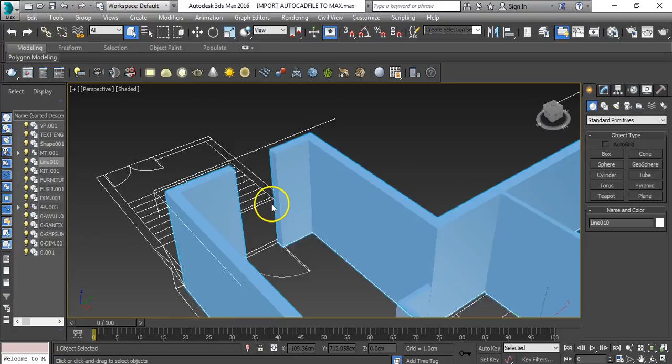And today we are going to continue from where we left in the last lecture. So let's go ahead. So let me cover all these top areas in the door side. Alright, so let's go to the top and let's cover all these areas.

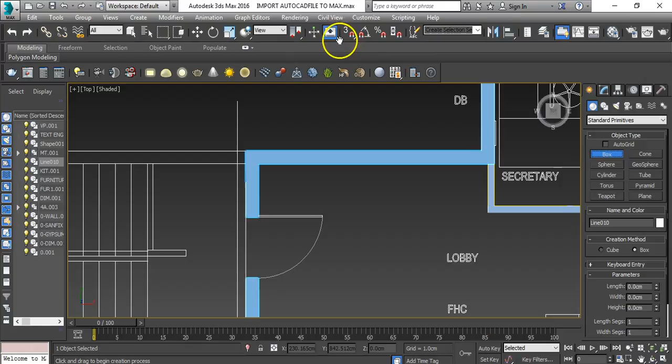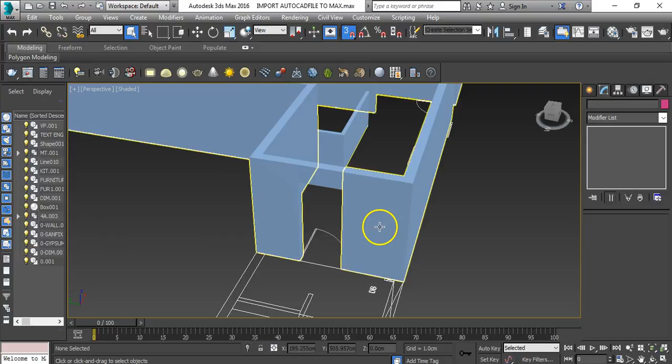What I'll do is I will activate snapping tool here so that I can draw this properly. Okay, and when you go to the perspective, you will see here, right, we have drawn this. I want minus 40. All right, so the height is 240 we have kept. So this is 40 centimeter and 2 meter height is the door height I'm keeping for this project.

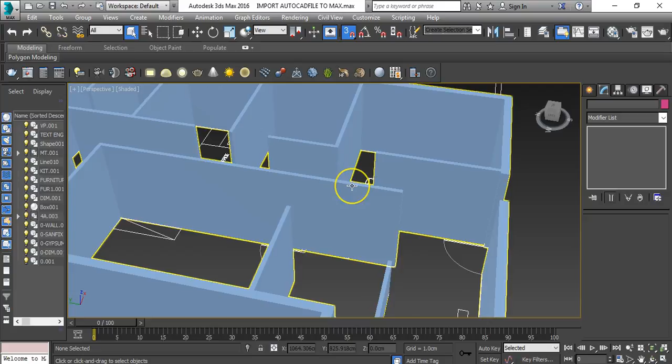Okay, so you can see now it is looking fine, right? But not this. This is good. So what I'll do is I will cover everywhere, here, then here, everywhere. You have to do the same thing. So go to the top view again, and let's continue drawing this. So I'll create this rectangle here, snapping on, and let's start creating it.

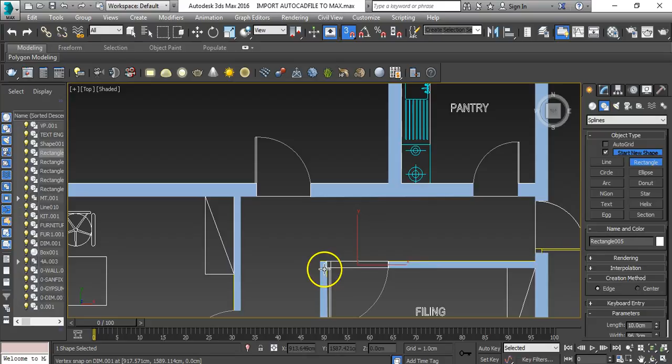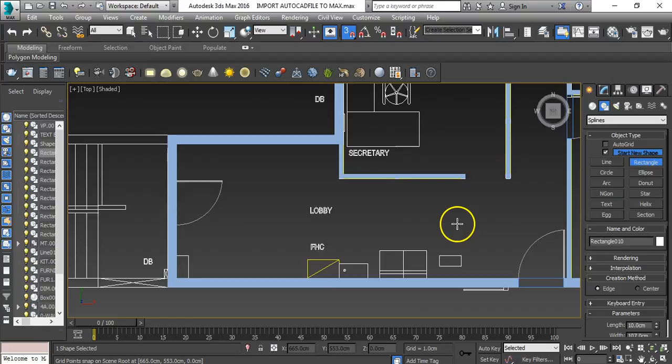I just keep on creating the rectangles everywhere where you can find the door, and then later we'll select all the rectangles and apply extrude on it, right? And we'll extrude all together, so you don't have to create boxes all over again. Okay, this will be open. All right, I think this is done. Let's go to the perspective and check it out.

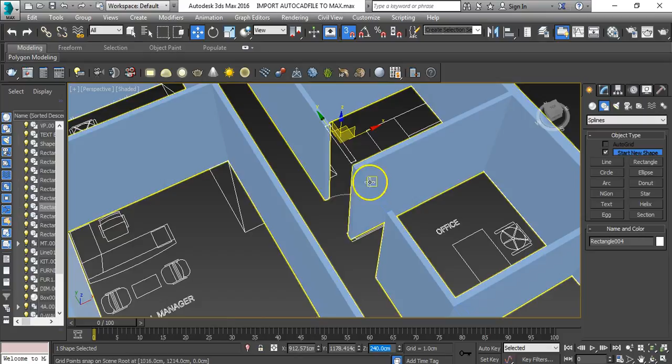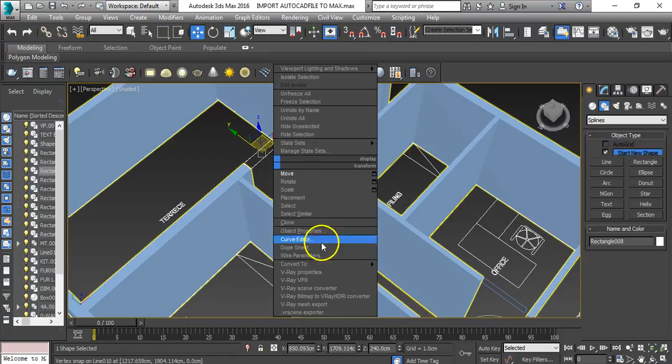All right, but some areas like you see here, it is here. Okay, so just select this move tool, take this to 240 place, that is here. Let me check this. This is not full. Later I'll do. Okay, here. All right, not an issue. So I'll select this one, snapping off, right click and convert to editable spline, and then keep on attaching all this spline.

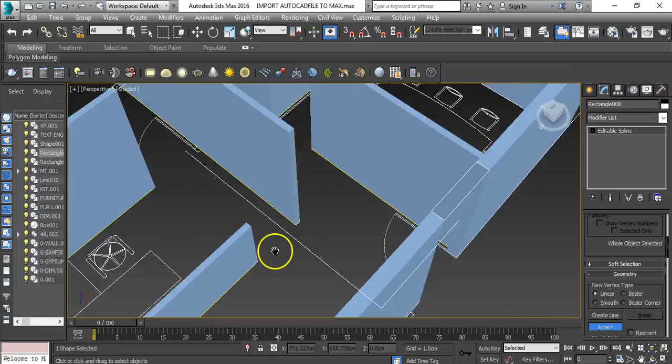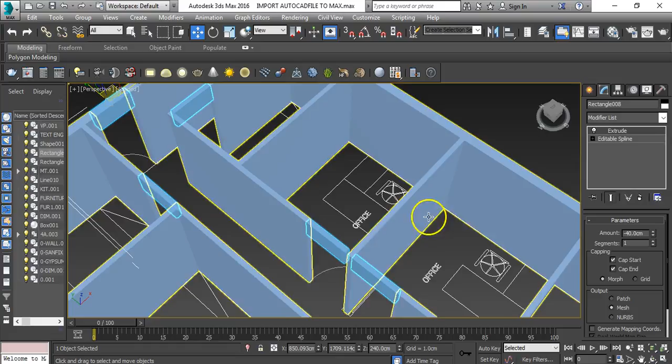Why I'm attaching is when I apply extrude, the extrude will apply on all the rectangles. So you go here and you apply extrude, and you see everywhere the extrude is applied because we have attached them. So then I will do minus 40. All right, here we have a problem, this one. So go here, click on this spline, move these two splines and take them inside here. Done.

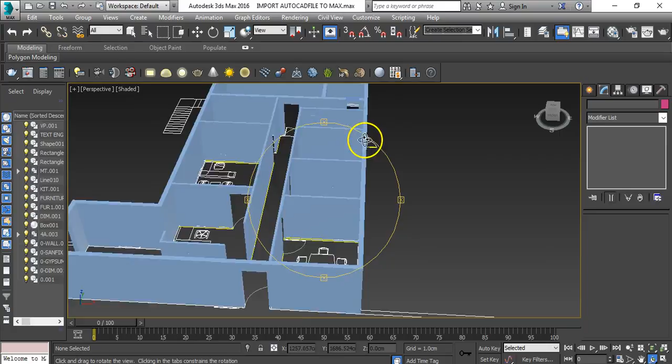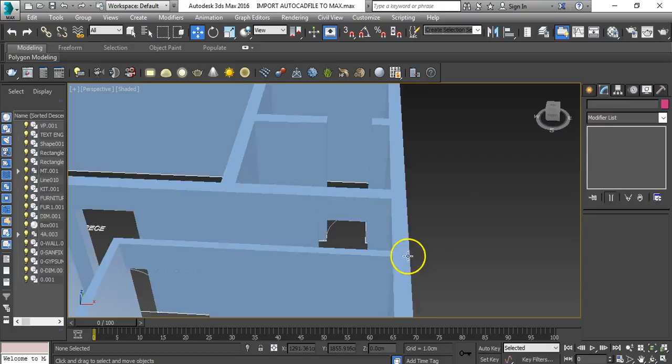So now when you see this, you have covered all the doors. Okay, here, we actually missed this one. We can apply it separately, not an issue. Apply extrude here. Extrude minus 40 is by default applied. All right.

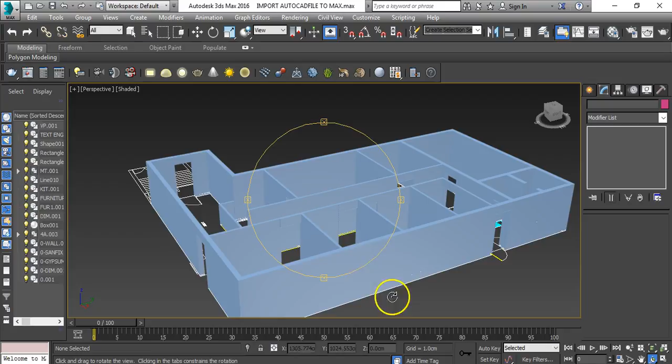And the next important task in this lecture is to create windows. So how will you create the windows? I mean, we are not creating windows, but the place for windows, just to make a hole inside the wall. So we will use boolean for that. Let's see how we can do that. First I'll go to the top, T, and let's see where we have windows.

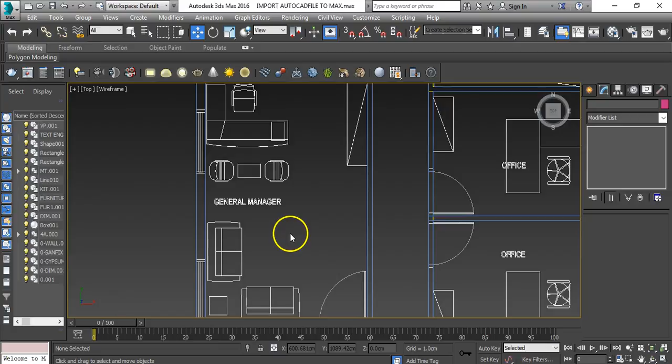Now you have windows here, but I'm not going to create a window here as the client told me not to, right? In the final plan, they actually removed this, and I forgot to remove it from here, because this is the lobby, and they want to place a sofa here and then a logo on the wall. So even in our lecture I don't want to create this. So where we will create is here, the general manager and this office area. These two areas are the main.

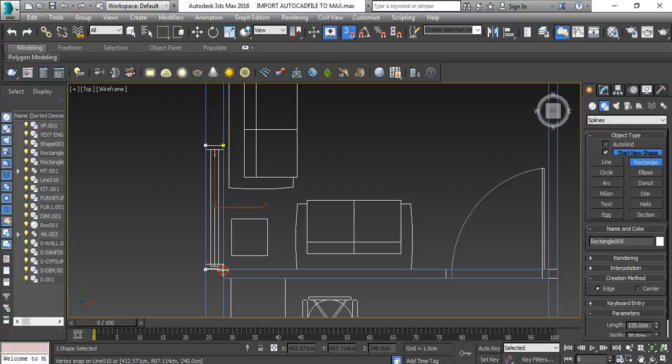Okay. All right. So let's create this window here first. I'll take a rectangle, snapping on, and create this part. And then come here and same thing. And you have window here, you have window here.

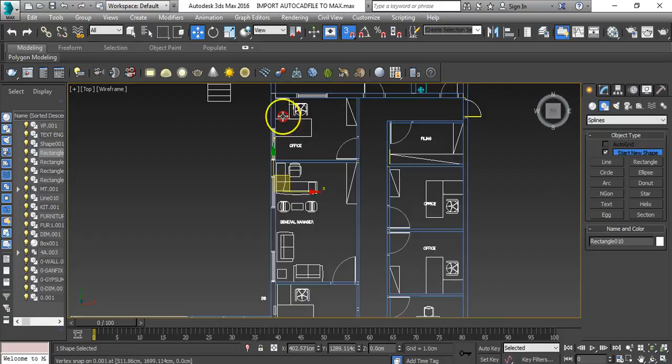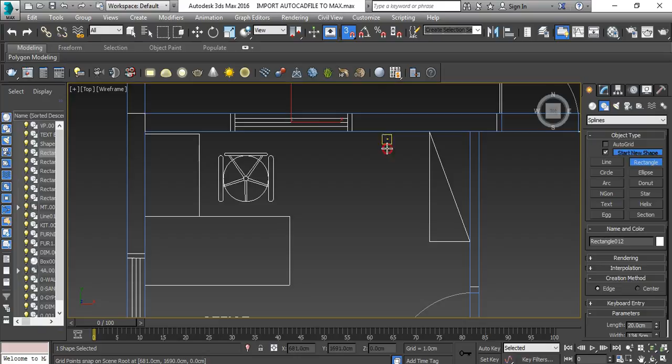But in the project, we are not going to show this part. The general manager room has two windows here. Let's create this also. And let's have this also. Let's go to the perspective view. Snapping off. And let's select these rectangles and apply extrude.

Now the total height is 240 and the door height is 2 meter. The door and the windows should be on the same line, right? So that means the end of the window will be at 2 meter. And I want the height of the window to be 120. So that means the window will start 80 centimeter above the ground.

So you go here and then apply extrude 120, but 80 centimeter above the ground. And I will scale this like this. Why, I will show you in a moment. Select this one, same procedure, extrude, move up, sorry, 80 centimeter above the ground, and then scale it up in this direction. Then select here and then extrude this one.

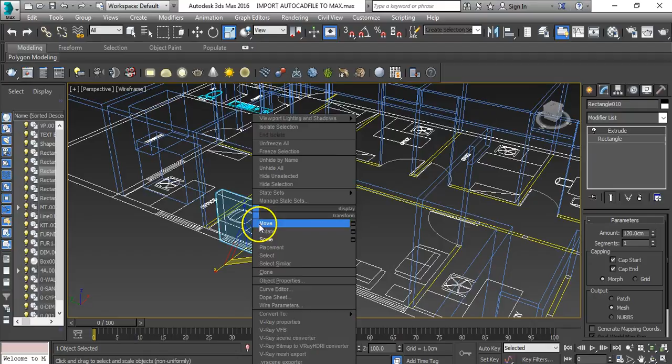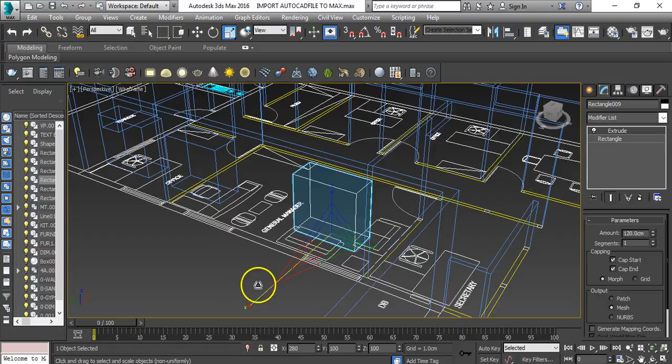Anyways, I want this one about 80. Scale this, select this one, extrude it 120 above the ground, 80 centimeters, and then scale. Done. So now when you go to the top, F3, you have these shapes here at the place of the window.

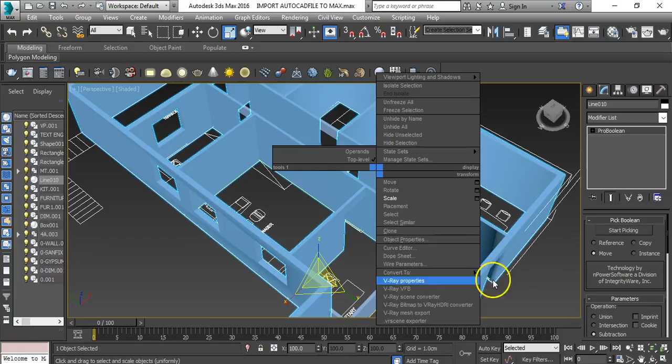Why I scale is because I want to boolean this area. So I'll select this wall, go here to boolean, pro boolean, start picking, and you can see we have created a space for windows. Don't worry about all this stuff. Convert this to editable poly, then select all the polys and go down, down, down, press clear all, and you will see that the problem is gone.

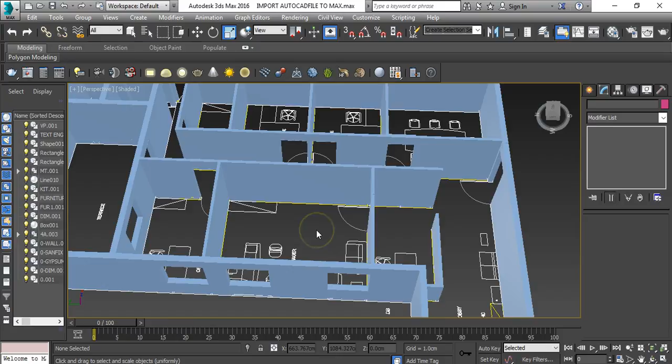So this is now the door opening, the windows opening, right? And then at the last, for now, what we'll do is create the floor and same on the top, the ceiling.

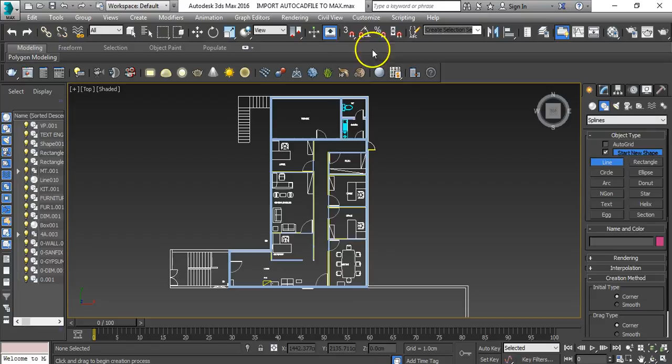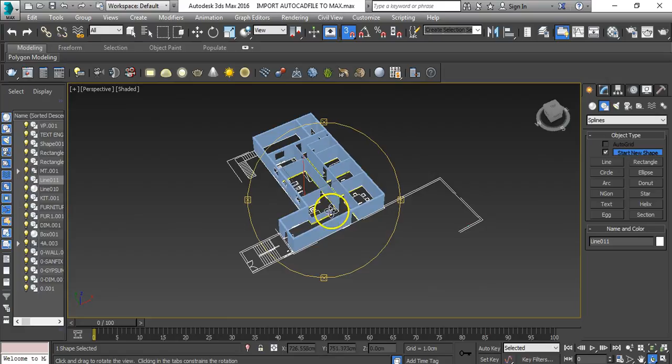So what I'll do is take a line, snapping on, and let's start creating from here. Go to the move tool and apply 0. Go to the perspective and check if we are correct. Sometimes there is a problem, like snapping causes an issue, sometimes one point here and one point here, so you have to align everything properly.

Go to extrude and extrude like minus 5 centi. Okay, so now you have a floor here. You can see we have a floor here.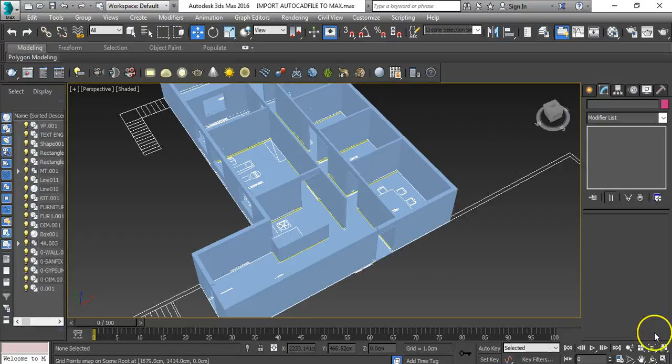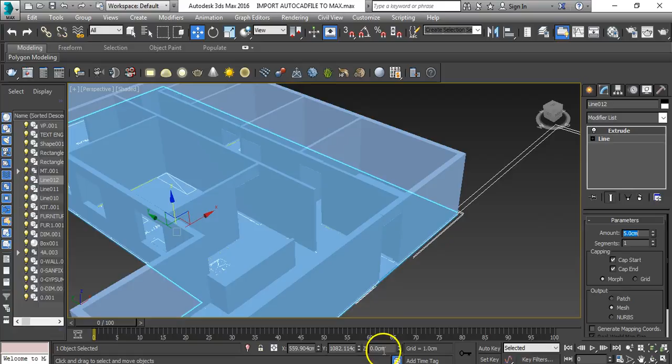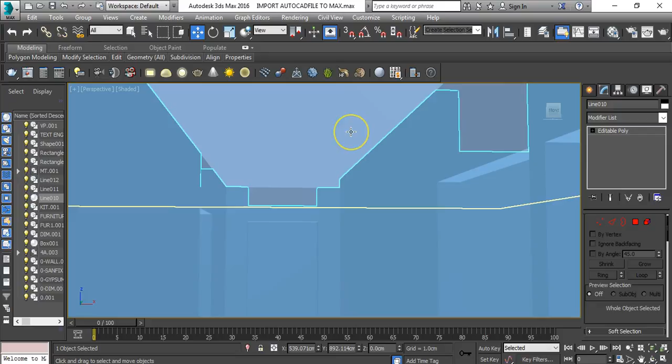What I'll do is select this floor and clone it, copy, plus 5 centimeter, and put this at 240 centimeter height. So this is your ceiling. So now you are inside your office, you can see here. Do not select this, just select outside somewhere, and you can see this, we are inside the office.

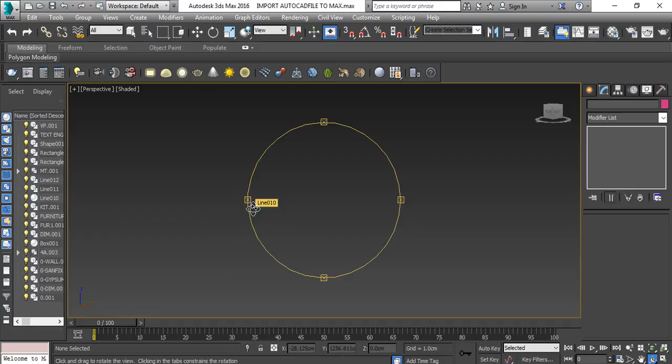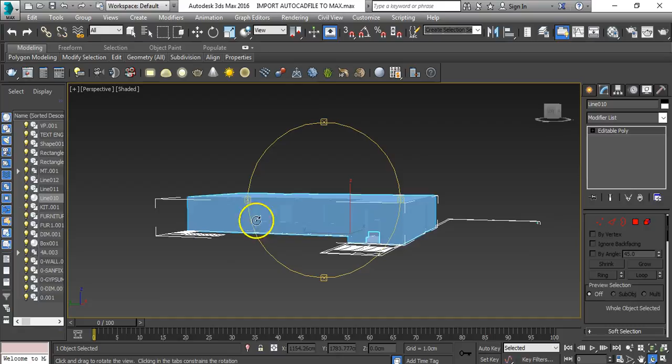I think this one is the secretary area, yes. Okay, this is the office, and this one here is the secretary area. And this is the entrance here.

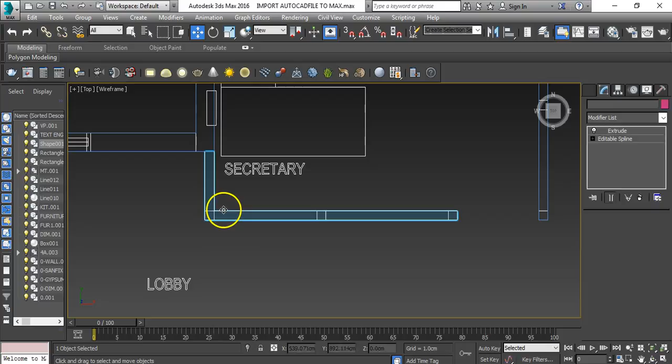Okay, so this is enough for today. Go to the top and see F3, right? This is the entrance here and everything is created. Here also I want to do something, I don't want this like this. What I want here is let's hide the top and let's hide the bottom also, and here I don't want like this.

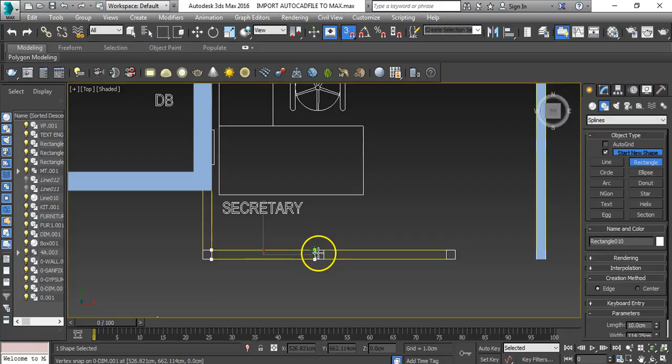Here what I want is I want this one as glass, so I'll create this separate. This one also glass, and this one here glass. So what you do is convert this to editable spline, go to attach, and attach all these. Let's move and see if we have attached the proper splines. Yes, okay.

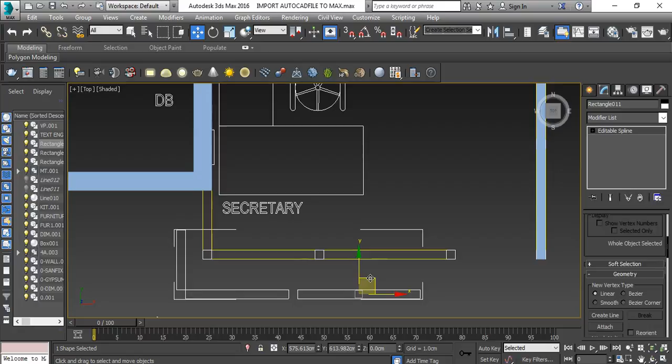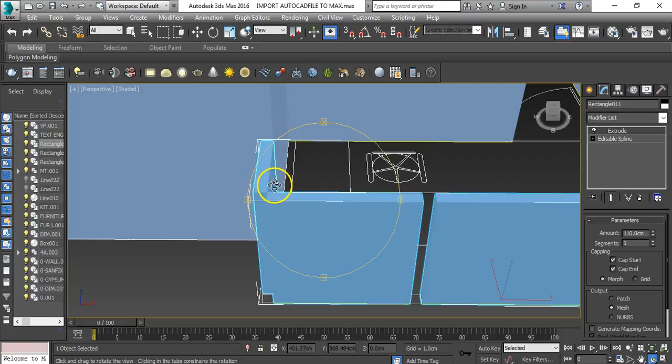Go to extrude here and I will extrude 110. This is okay, like this, this will be the glass. Later on I will actually reduce this width because this is too much here, I don't want this much thicker glass. And here you can see this thing is like the support of these glasses.

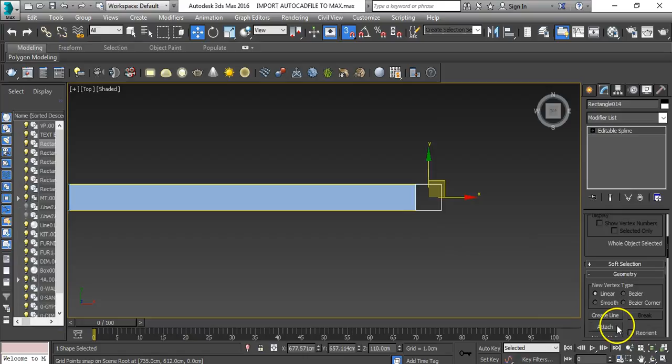So let's create here the supports. Attach this also, and then go to extrude, and you have it like this. Oh, we have got a problem here.

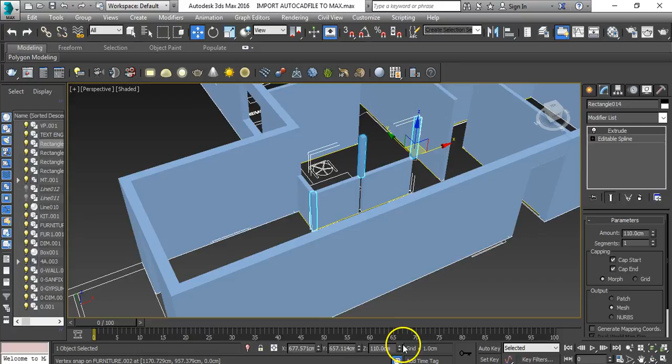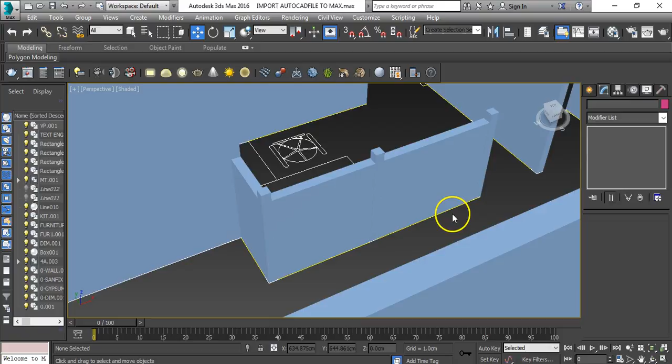Select this, snapping off, take it to 0, and select only this particular spline here, this one, and make it 0. I don't want the same, I want this one at 120 just to give it a shape like this. It's looking nice.

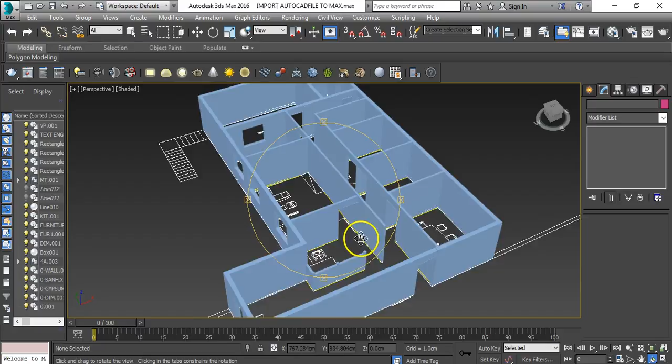Later we will decrease this length, this width, so it will fit into the supports, these legs here. So this one is enough for today's lecture. Just practice, create these things, make the hole here, create this one, create the floor, clear this link.

In the next class, we'll take any one area, for example, this general manager room, and we'll create the window curtains, create shelves here, then create ceiling, everything, and we'll set up all the necessary furniture here, so that when we start lighting we'll use this same area for lighting, texturing, and rendering also. So we will take up this area in our further classes.

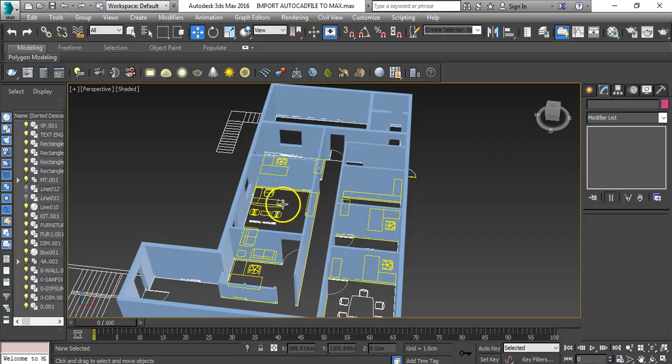But you have to practice everything the same way. Like here you create the ceiling and everything, but first you need to do the same thing I'm doing here, practice it, and then you can do all the other areas, the plan you can work on.